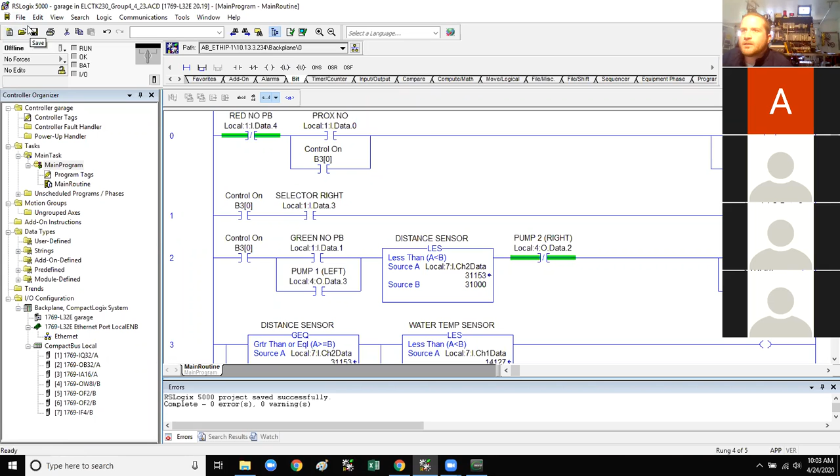First thing we need to do is, we ran into problems last time because we didn't have any inputs to tie into our program. So I'm going to need help with this. If somebody can get all the inputs and outputs pulled up. What we got to do is all the inputs that we're using for our program, we need to parallel a B3 around them so we can pull that bit up in our HMI software.

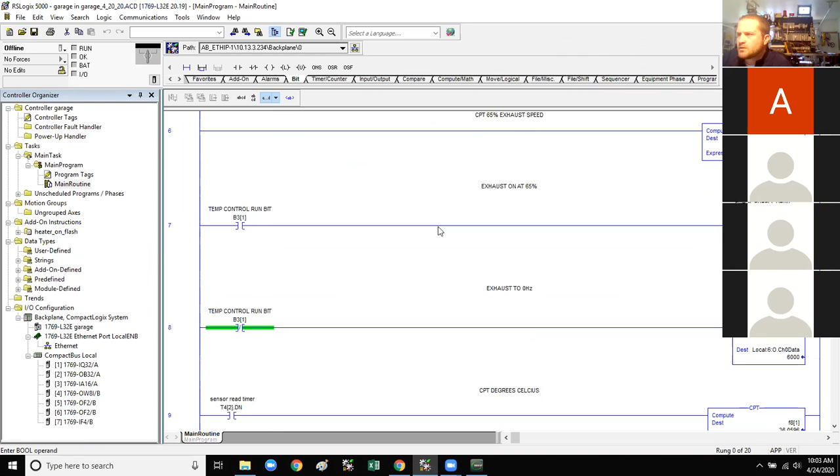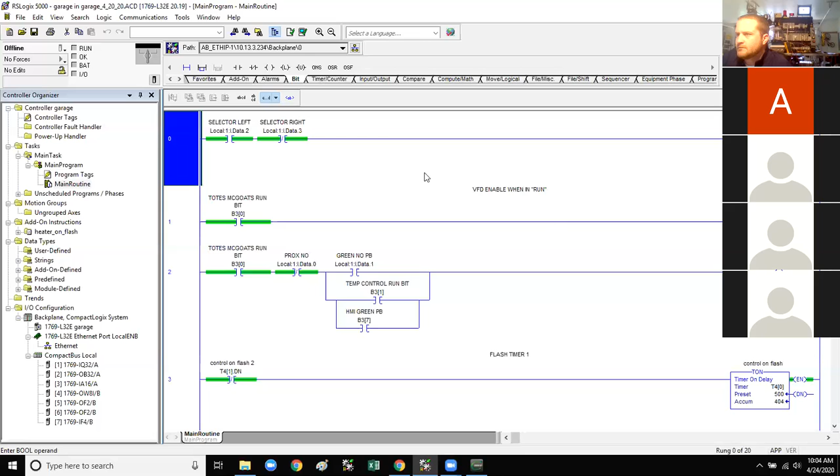Okay. We've got this B3[7] around our temp control run bit. Let's rename that. So selector left, that's our enable, like process enable.

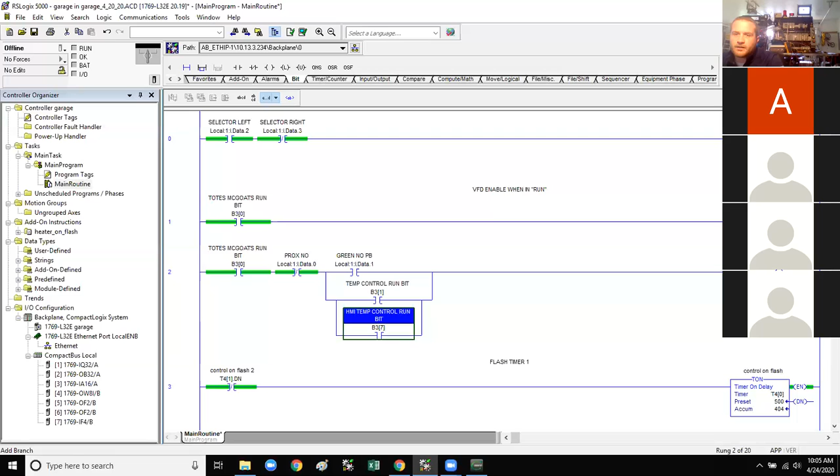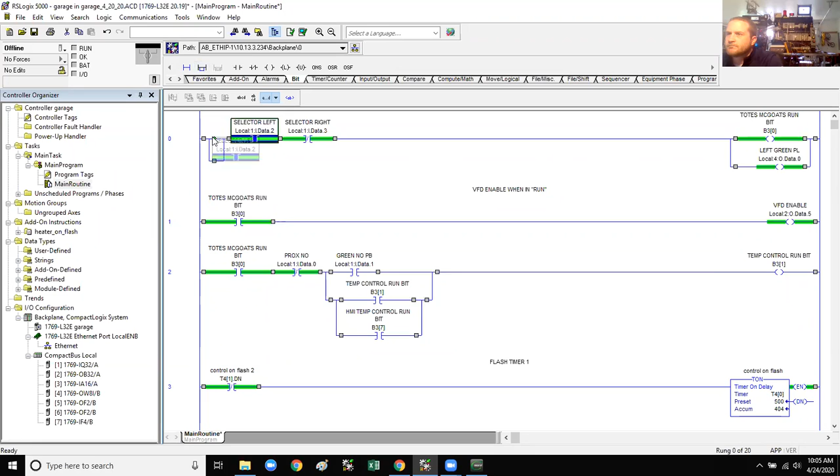Hello? Yeah, you guys got to help me out because I've been working with everybody in all their groups and I have all these different processes in my head. Sorry, go ahead. I don't remember this process. So selector left, that's our process enable. No, I don't believe so. Let me check, I wasn't on that. I was on that. It is? Okay, yeah, it is on there.

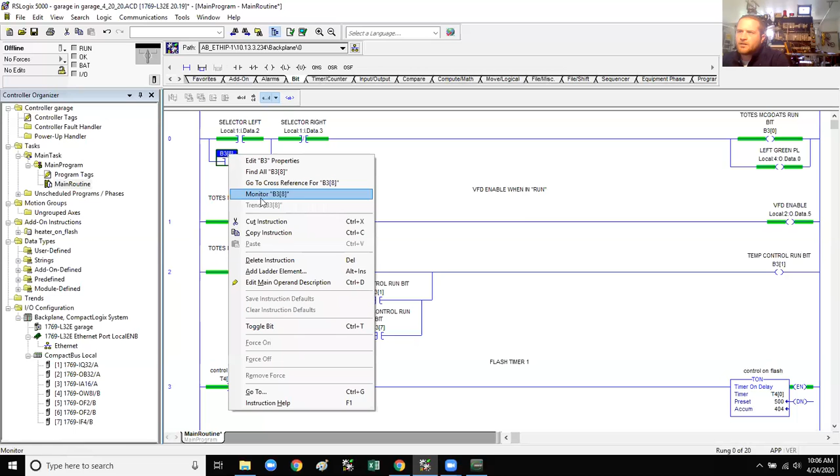All right, so we need to add a B3 for all of these inputs, all the push buttons and selector switches and prox switches. HMI, process enable. Prox switch is our kill switch. Is that right? Yes, yes, so we need to add an HMI kill switch. So this will be HMI e-stop. Make that B3[9].

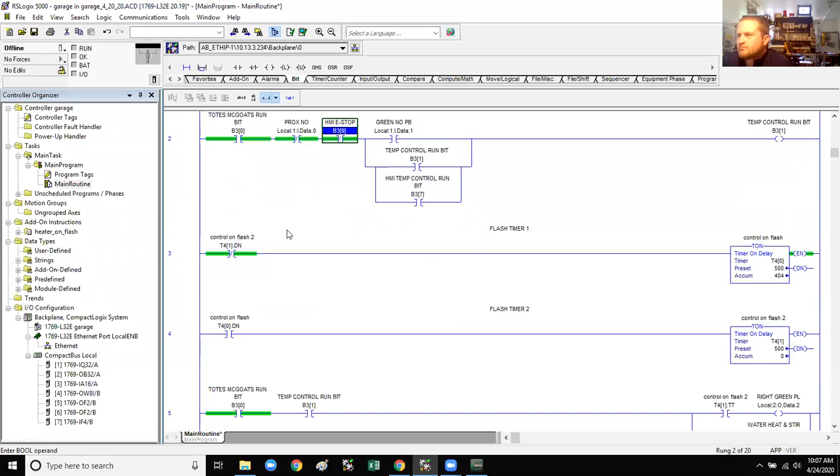I missed it, start from the beginning. Nope. Zach, start over, please, ain't happening. Dude, serious? We're not, all we're doing right now is adding B3s to all our inputs so we can put them into our HMI program. Oh. Are we gonna have to connect the HMI for our final? No. All right, well, then I'll see you guys Monday. See ya, I'm just kidding.

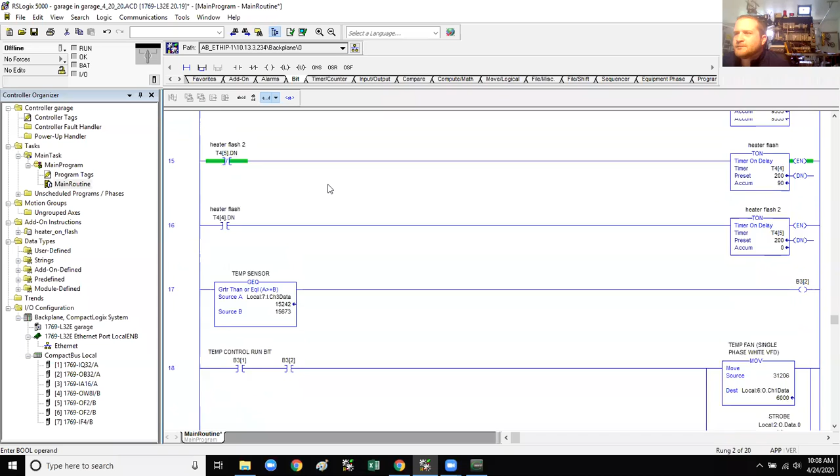It's awesome that you can design like essentially what is like—I forget where I was even going. Yeah, how come we haven't just muted Nathan yet? Okay, that was last week. Oh, poor Nathan, that's every week. Don't worry, that's every week.

All right, is that all we have for inputs? We're not using the yellow button or the red button? I'll go back to the process. Oh, I think I got it pulled up. Yep. Okay, and that's fine. Is it?

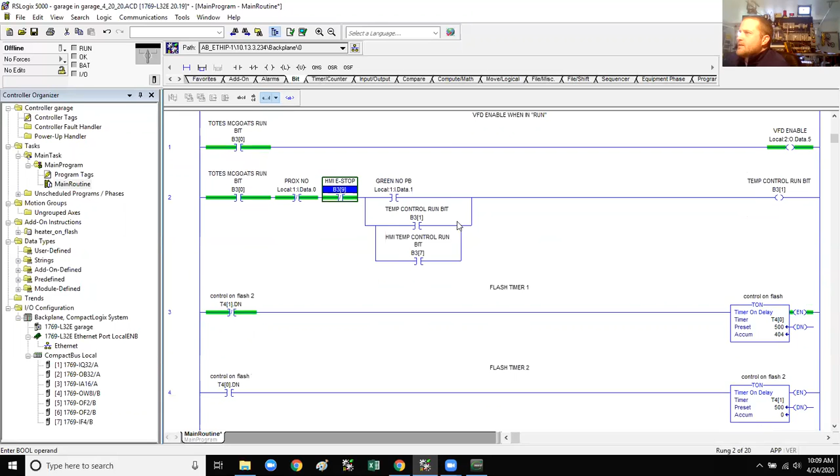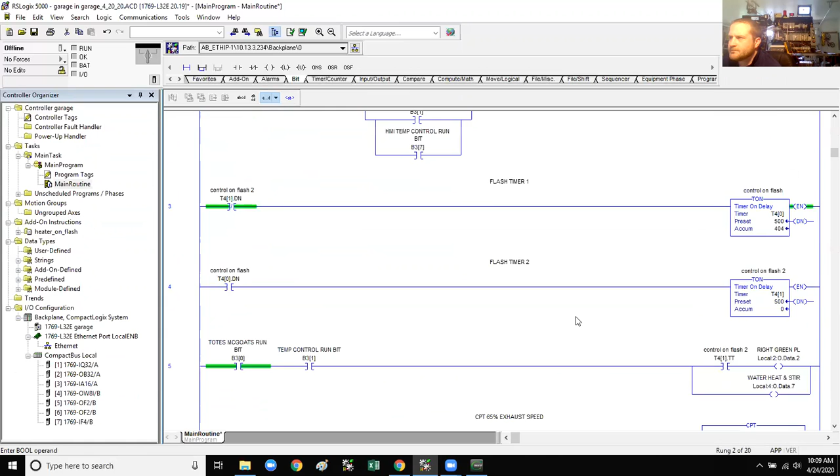The only other thing we need to do is we need to decide, are we going to display temperature in Fahrenheit? Are we going to display temperature in Celsius? If we do, we need to make sure we have an F8 value. The process says it has to display the temperature in Celsius, on the 3-digit display. I'm talking about displaying it on the HMI.

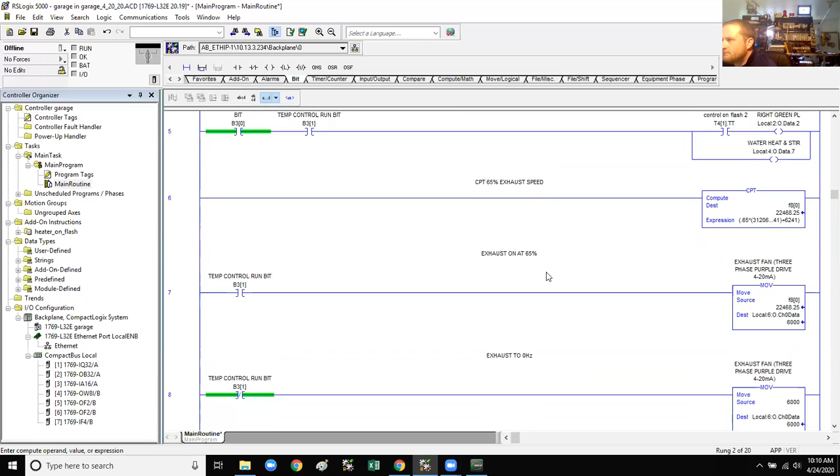So like if we look at all these values that we have, we can use the HMI to display to the user what the fan speed is, what the temperature is in Fahrenheit. So F8[3] is going to be temperature in Fahrenheit. Will we be able to do that? I remember the last time we were trying to do this, we were having some trouble exporting the PLC program to the HMI. Yeah, I got that fixed.

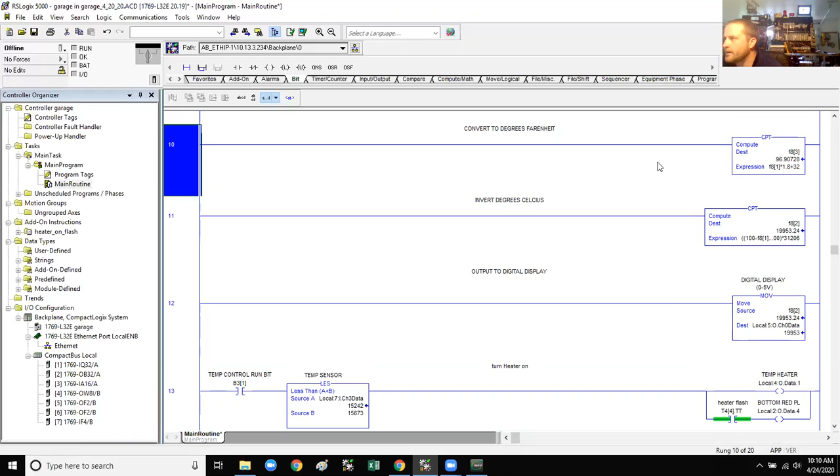I just had to change the IP address settings, and the laptop and the HMI and the PLC all have to jive with their IP settings. So that's all good, we're communicating just fine now. Okay, now we just need to make sure we have in our program what we need. So somebody write down that F8[3] is temperature Fahrenheit. F8[1] is temperature in Celsius. What else do we want to display?

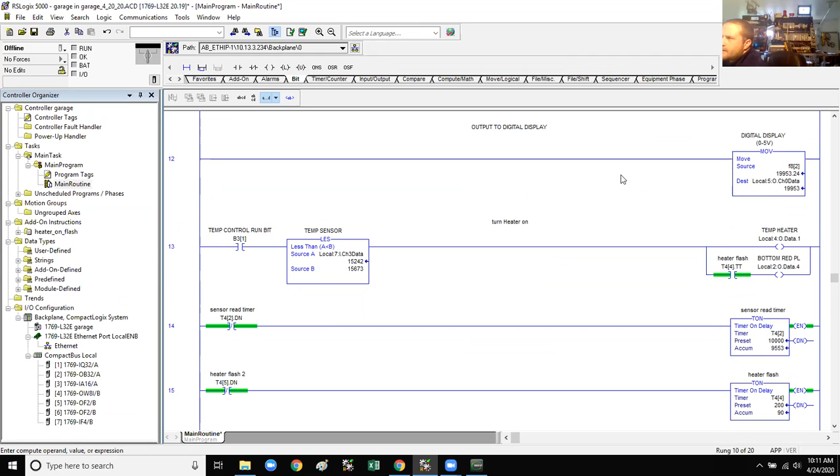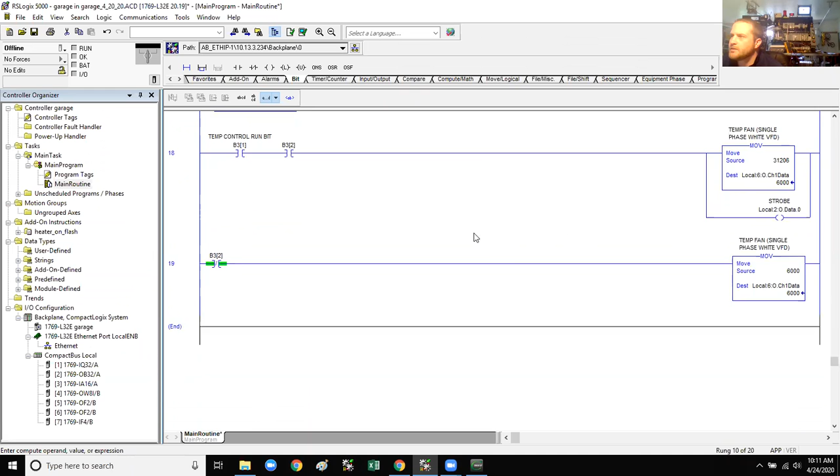We can display all the pilot lights. Those are all ready to go, we don't need to do anything there. We might want to display the speed of each fan in like a percentage. You guys want to do percentage or hertz? Hertz.

What class is this technically? 232? All right, well, no, I was just wondering for the, like, what I'm looking at under Blackboard. We should do temperature in Kelvin. Just kidding, that was a joke.

All right, I'm just going to add a couple rungs here because I don't think we have any F8 values that are fan speed. So I'm going to make, let's see, compute.

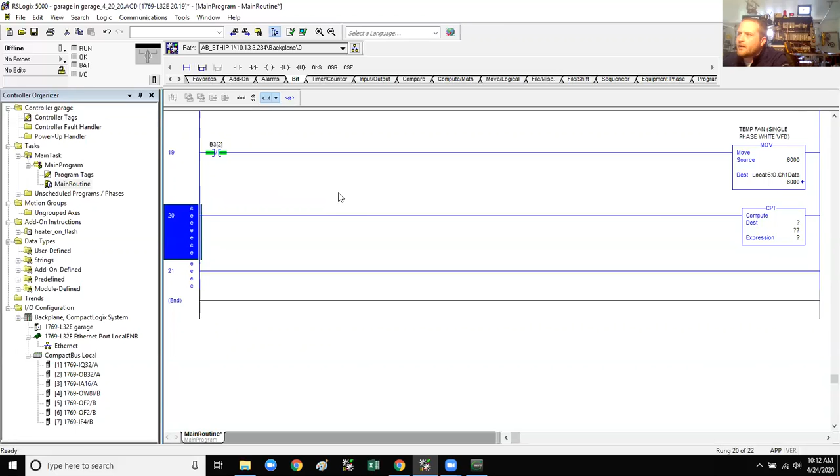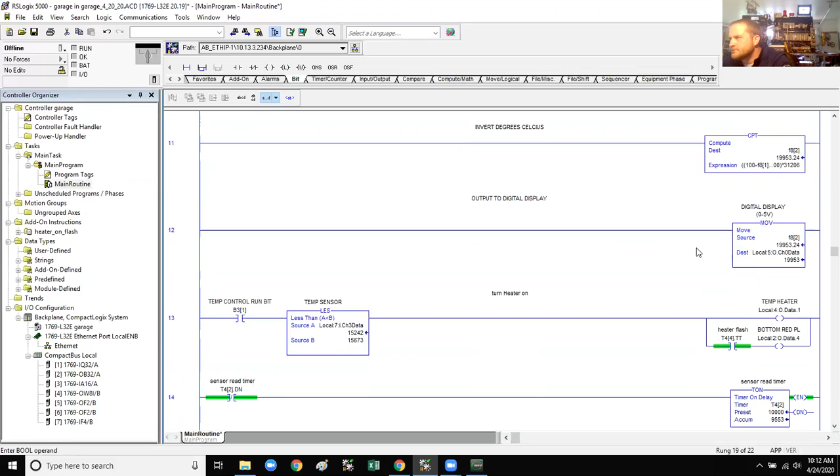What did we decide? What did we just use? 7 and 8? What do we use? F8 what? F8.3 for temperature in Fahrenheit. F8.4 for temperature in Celsius. No, F81 for Celsius. So we're using 1, 2, 3.

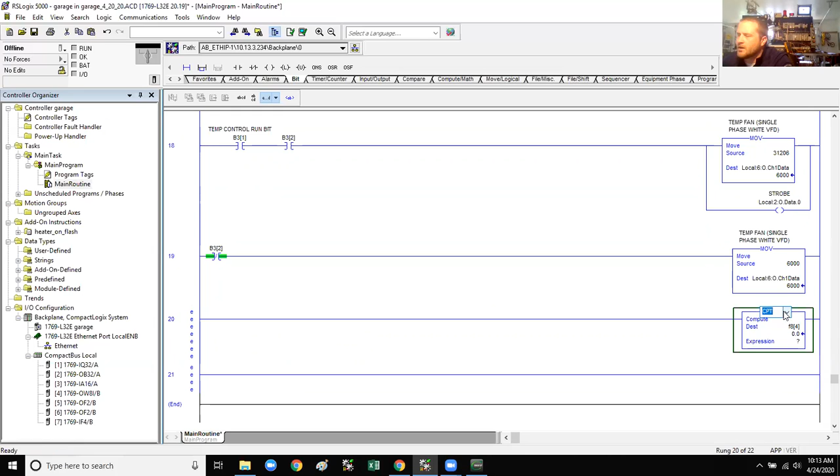So let's call F84—it will be the temperature in, or no, fan speed, exhaust fan speed. That's not what I want.

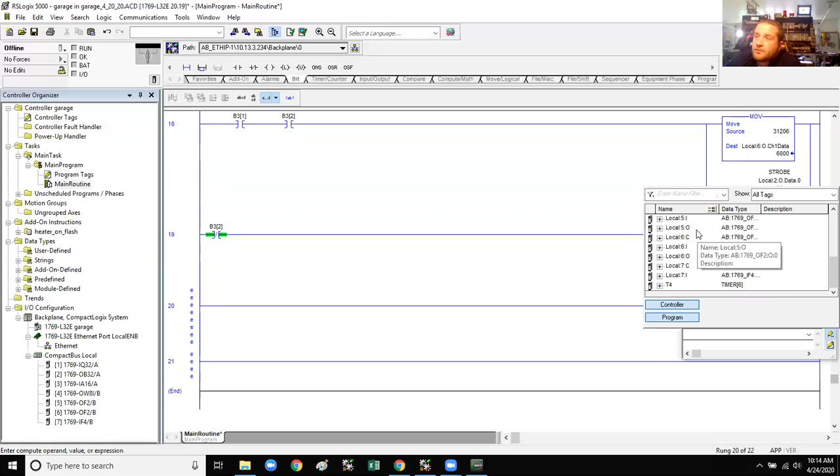So how do we find the exhaust fan speed? Any guesses? Well, don't we have it set to 65%? Yeah, but we want it in real time what the fan speed is, just to show the user. With the VFD? Yeah, so anytime we change the fan speed...

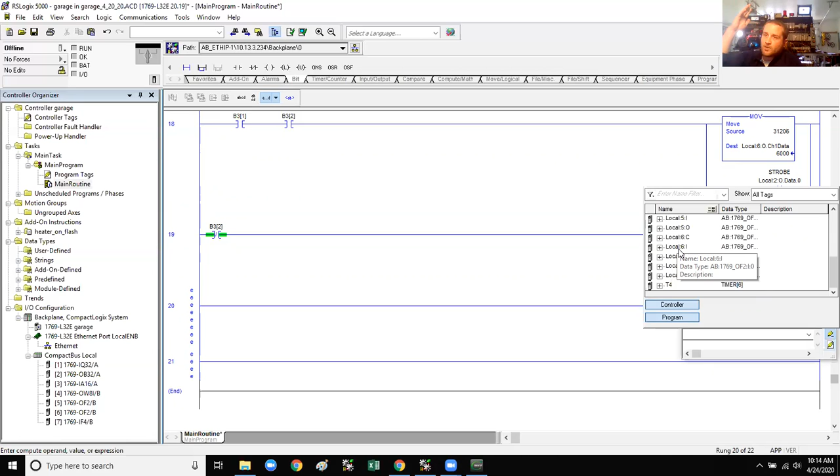It'll show it on the HMI. Does the HMI have a compute function, or could it be connected to a compute function? All it's going to do is take the tags we have in the program in the PLC, and sit there and read the PLC program. The PLC is going to tell you this F8.1 value is 34.9569, and it will take that information and do whatever you want with it.

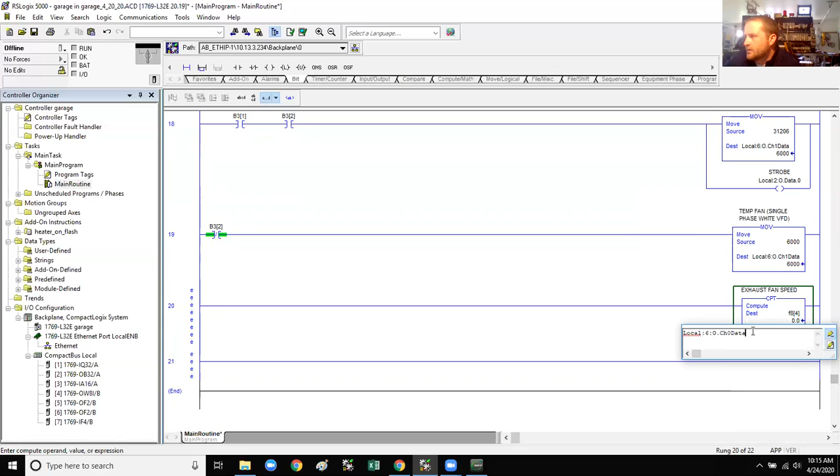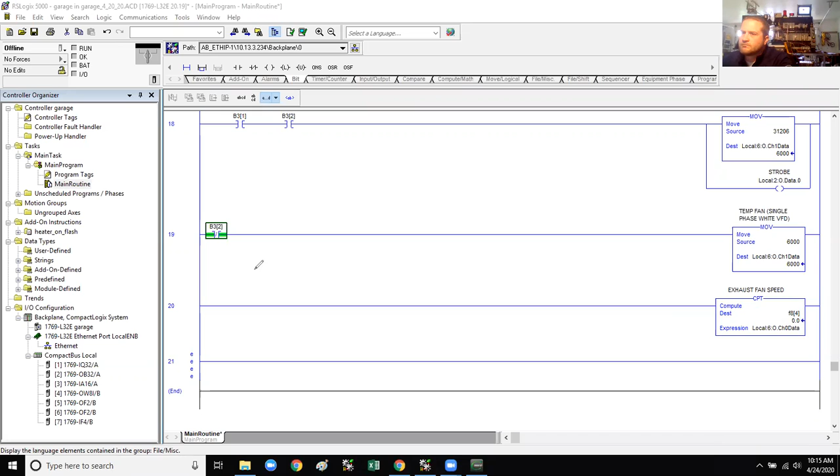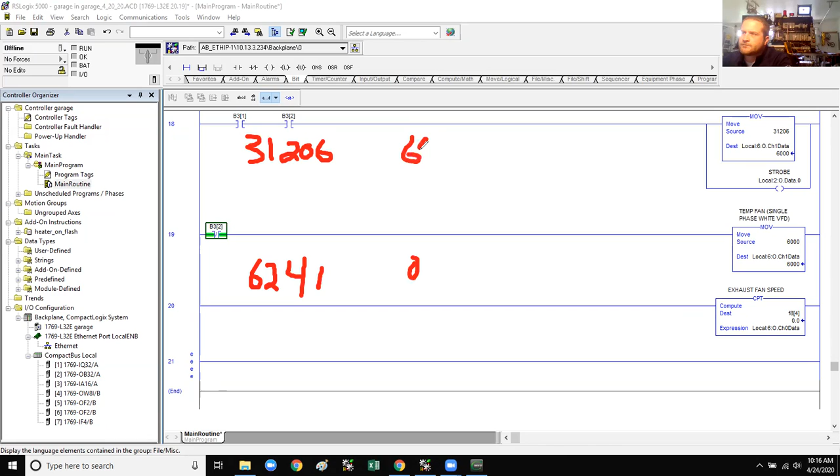Okay, so how do we interpolate those numbers, 6241 to 31206? And this will be the same calculation as the temperature fan, 6241, 0 to 60, 31206. So F8.4 is going to be somewhere in here.

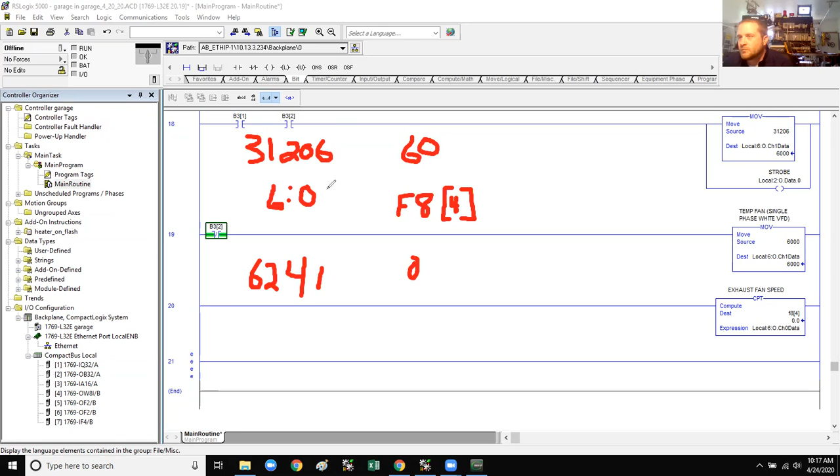So we want to take this value, which is local 6 output channel 0 data, I'll just say 6 out. Whatever that happens to be at the time of the program, we want it to spit out a 0 to 60 number. So how do we do that? With a compute. If 6 out happens to be 20,000, we would take that number and do what? We'd find a percentage of this range, right? Yeah.

So we're going to take 6 out, and that's our output number, minus 6241. We're going to take that divided by the whole range. Following me? And what does this value give us when we calculate that? It'd give us the percentage of this range, right? Yeah. Very good. And we're going to take that percentage and apply it to this range. So this whole formula times the range of 0 to 60 is just what? 60. Yeah.

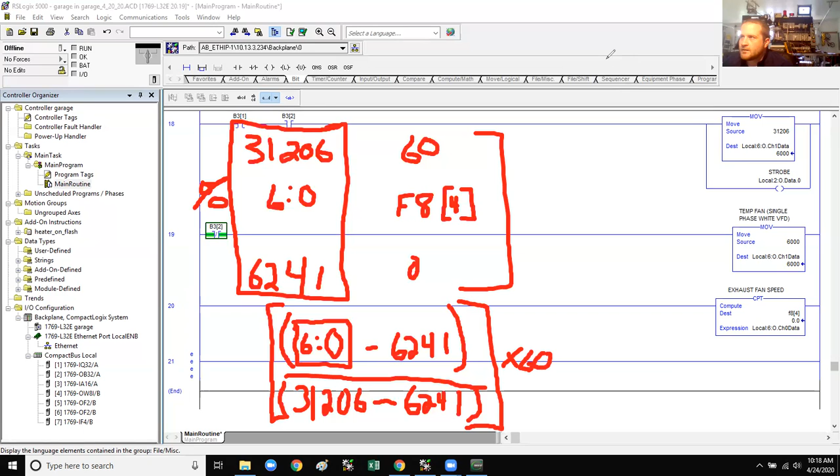So our expression would be local 6, whatever, minus 6241, divided by 31,206 minus 6241, that whole thing times 60. This one we're going to call F85, and that's going to be temp fan speed.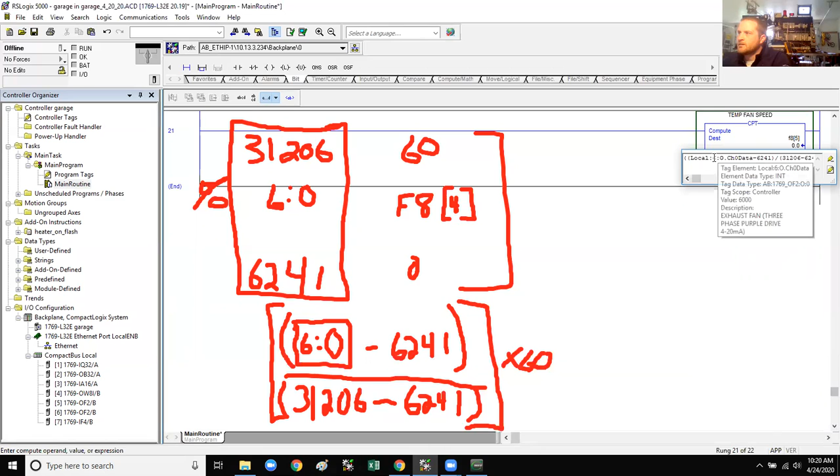The only difference is this. I think it's going to be channel 1 data, right? But we can just use the tags. So it'd be 6 out, channel 1 data. Cool? Yep.

We're doing that because we want to control the temperature cooling fan. We're not using these rungs to control anything, we're just assigning compute the Hertz value to an F8 number. Then when we open up our C-more HMI software, we can use these numbers on a display screen that shows you the exhaust fan right now is at X amount of Hertz, right? Yeah. Cool.

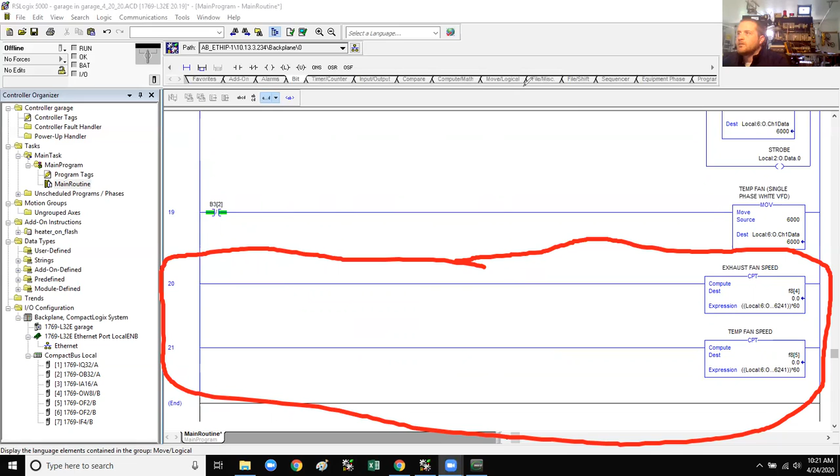All right, and then I'm going to save the XML file. I'll save that as 4 24.

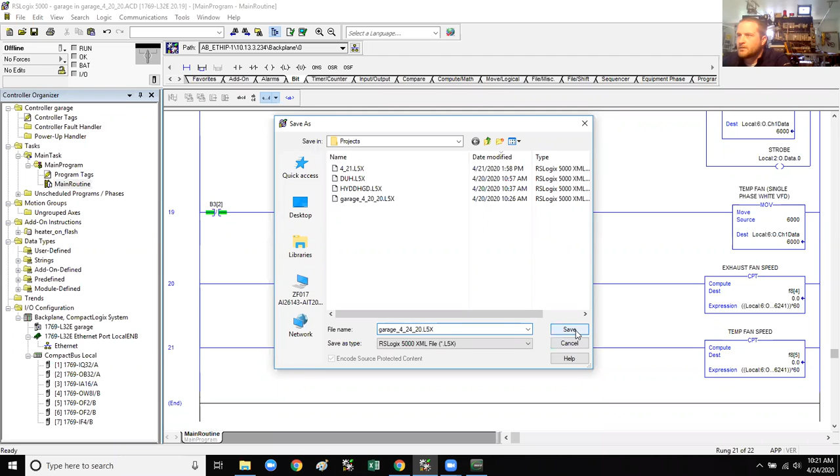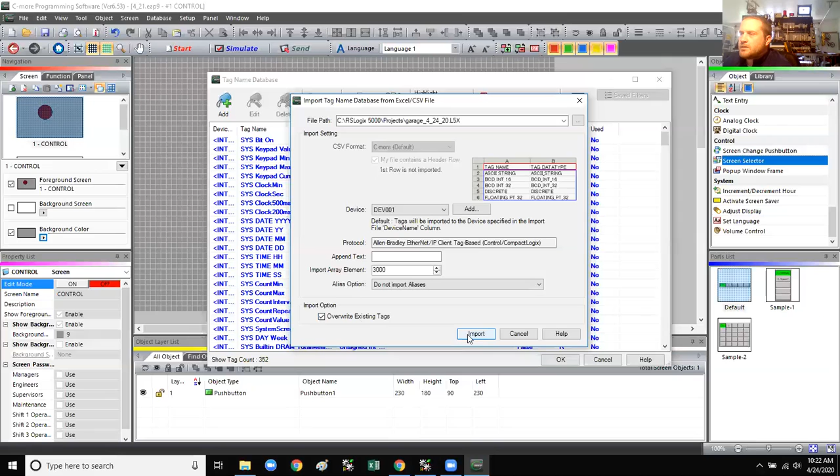I'm going to go into C-more. Database, tag name database, import 424. This device, overwrite existing tags, import, filter. There's all of our tags that we just imported. We should have an F8 whatever.

Yeah, but the description, I wish it would bring the descriptions over too. Now, is that because it's older software, or does it just not bring the descriptions over at all? I don't know if there's a way to do it or not. I guess when you save it to that L5X type file, it doesn't save the descriptions. I think if you had your own tag names, like if we went through each of our tags that we were going to use and made our own tags, it'd be easier to figure out what we were using. But that's just not how I personally write the software or write the logic.

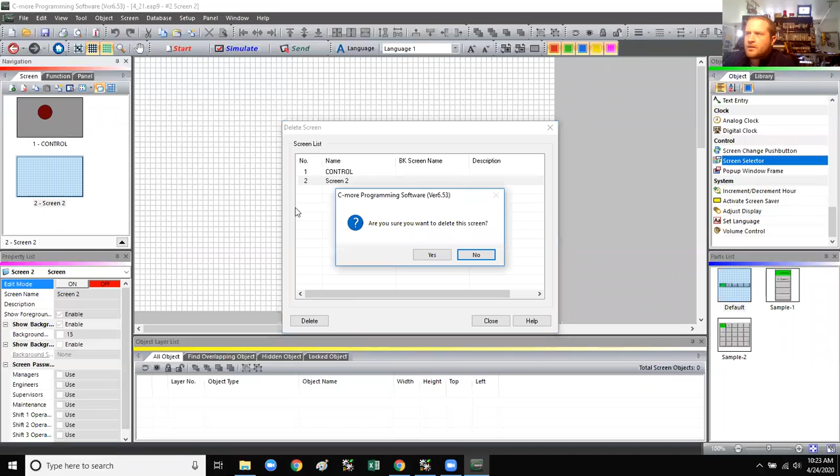So, but it's okay, we've got a list in front. Somebody's got a list in front of them, right, of what we just talked about. Sure. Good. Okay, I'm gonna start over with this screen. So here's all of our screens. I'm just gonna delete this one for now. I'm making screen 1. You got a stop button. We do.

Screen 1, what are our inputs? We've got e-stop, the 3 B3s that we put in there. We've got e-stop, we've got control on, control on, and temperature control start.

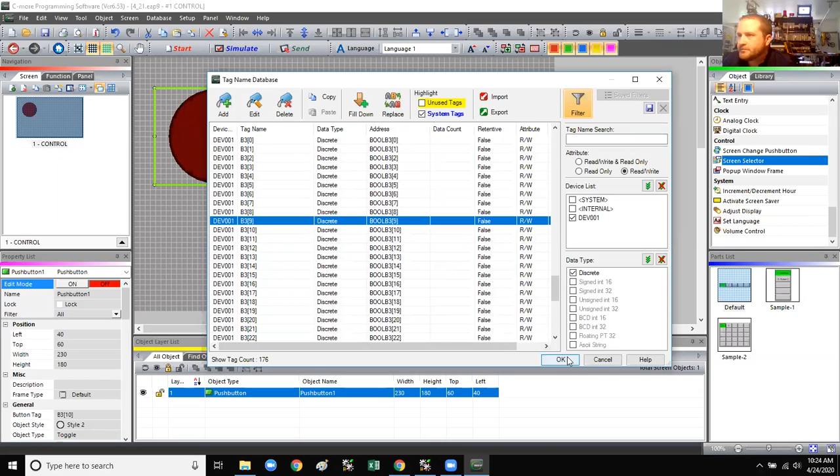Right, okay, so let's edit this one. Name, e-stop. I don't care about all this stuff. Tag, we're gonna make that B. Is it B? What is the e-stop? B3 what? 9. Thank you, somebody. Brayton. B3.9.

So we can have the object type be toggle. That's a normally open push button, right? And in our logic, all we need to do is momentarily energize it. So we're going to change it to momentary on, which will make the bit true, and so on and so forth.

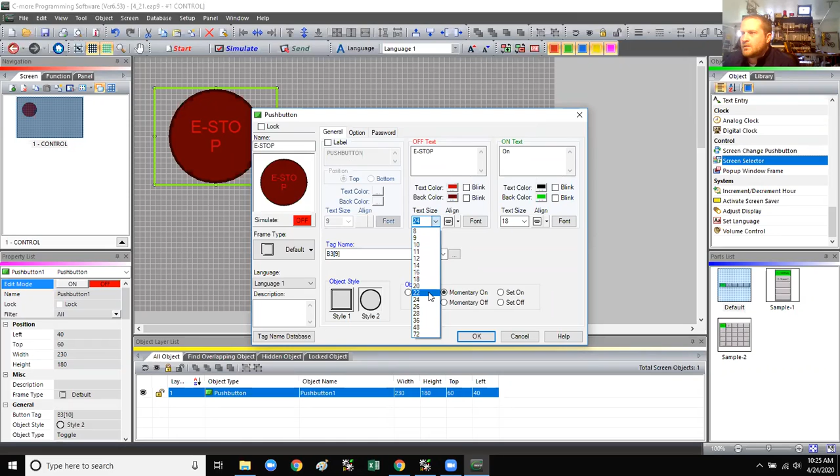B39, text size. So we'll make it, we want it to be dark red. We want to say e-stop. Bigger. And when it's energized, just when I depress that button, we'll make it say stop, and we'll have it like a bright red.

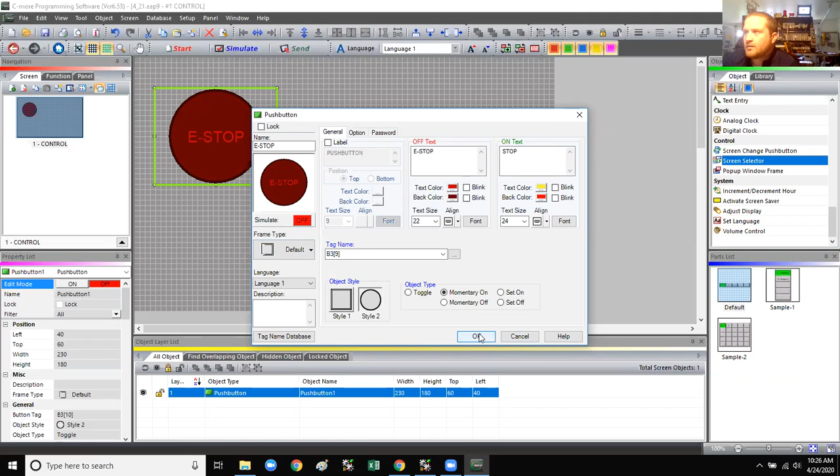Then if you want to simulate it over here, so right now it would be in the off or de-energized state. And then when the HMI is loaded, I press that on the HMI and it will momentarily turn to that, and then I let go and it'll turn to that. But it should stop the software. That's cool. Well, hopefully we're doing it right. That's the only thing.

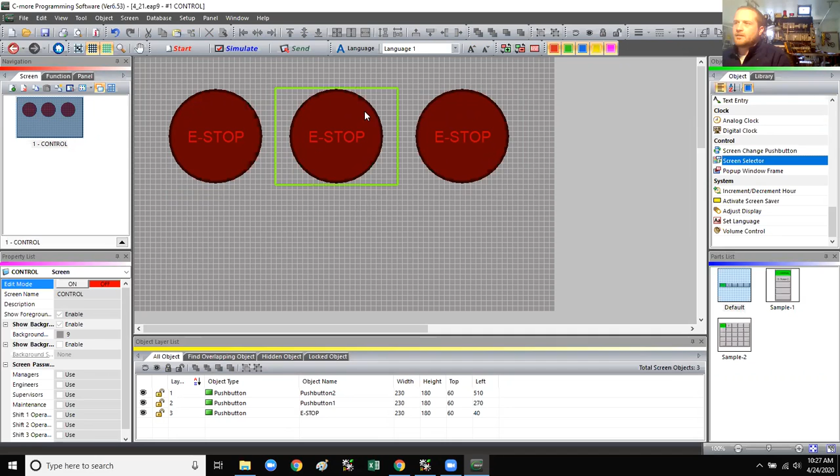We could put different types of buttons in here, maybe we will. But all I did just there, this stuff is really easy to manipulate. All I did was Control C and Control V, just copy and paste. And then now I can just change this one, this will be our control on.

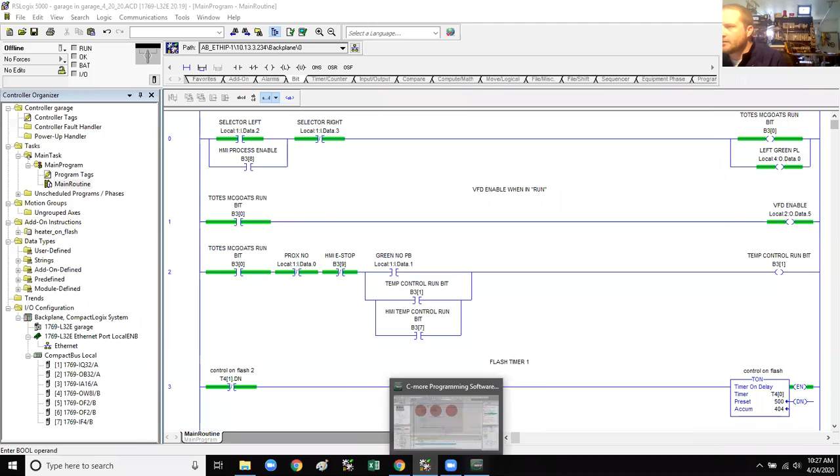What was our B3 whatever? Process enable is B3.8. We want that to be like a green, right? And then when you depress it, it'll be something like that.

Process enable, and make the text size say enable. Okay, so that's what will happen when we do that. That's going to be a momentary on. And then...

Temp control start will be the next one. Was B39 the right one? What did we say it was? I don't remember. 3.9 was the stop. B3.8 was the process enable. Thank you.

Okay, and then this one will be temp control. What do you want to do with this one? Make it like pink. Yellow. Pink.

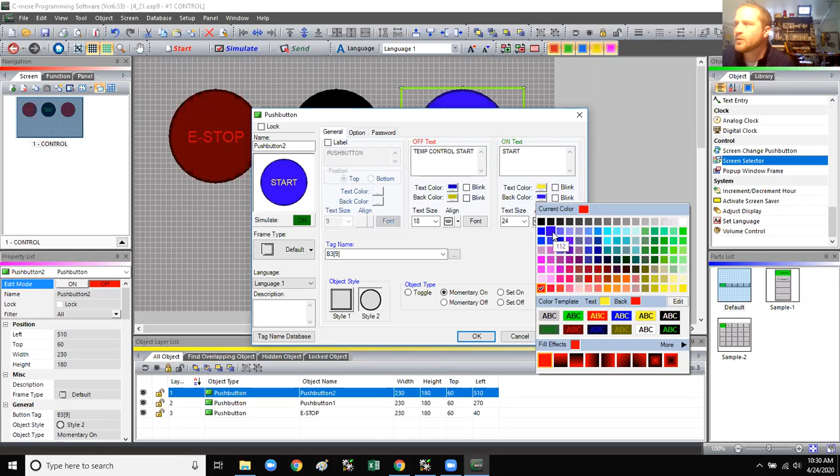So we're kicking John out today, or, wait, speaking of destroying things, did you ever change that fuse out? Or was it, no, it's still. I do have some more fuses, but that's a great question. I think he's got a bolt in there instead, that's cool. Look at these things, look at this, look at these little shaded doodads. A red start button. Oh my gosh, that's deadly, okay, those are cool.

Fill effects, this is cool, let's do something fancy. So I know you said it wasn't required for the final, but can we do that on the final? If you have extra time, heck yeah. So, I will not have extra time. You're already planning out that you don't have extra time.

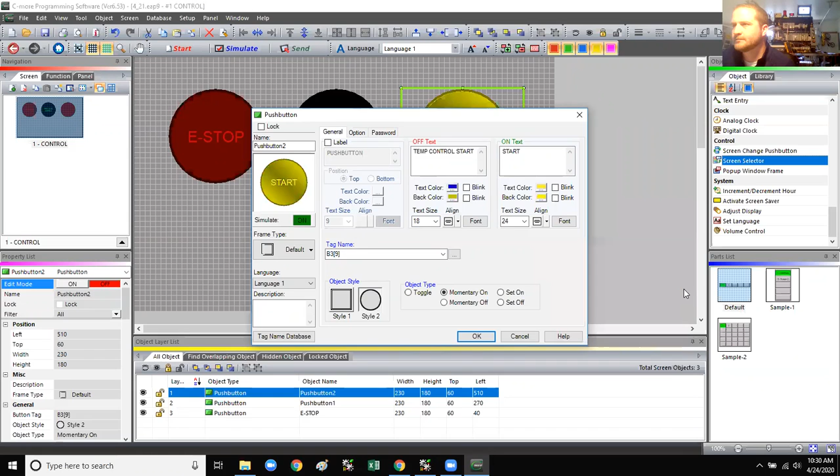So simulate it. Yeah, I don't know what this is. I'm getting out of here.

All right, right now our background is just a gray screen, but we can do some fancy stuff there. So this is just going to be screen number one, it's going to be the control screen, and eventually we'll have other screens that will display other things we want them to do. But right now, this is a good place to start. So, background, we're just going to put a picture in there.

Whoa. User graphics, that's cool. I just downloaded something. I guess it's not going to work because it's not a bitmap.

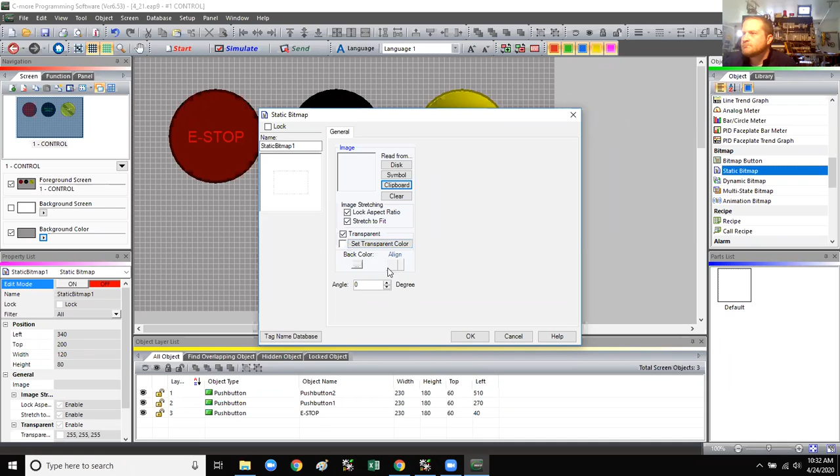Oh, boy. Landscapers. I guess we can't put that picture in there right now. Whoa.

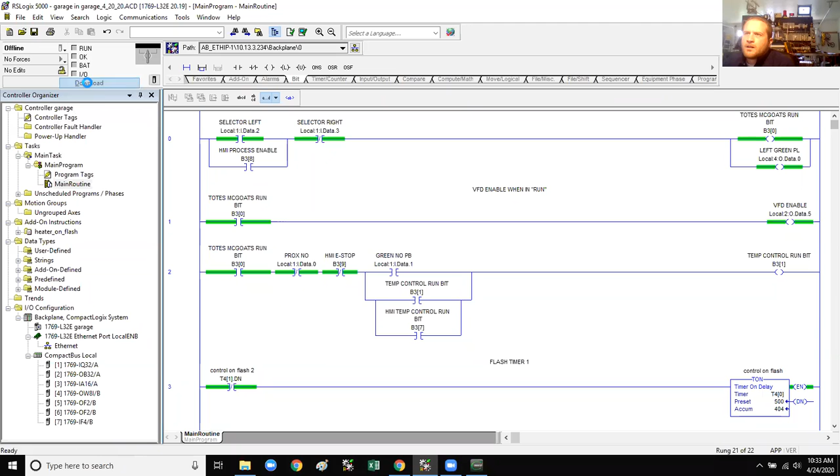All right, so I'm going to save this and send it. Could you add pictures, like say a certain meme about the L drive? Oh, I could, but actually I downloaded this ICC logo and was going to put it as a background, but it's saying you need it as a different type of file instead of a JPEG.

I don't know how to do the convert. Do I look like I know what a JPEG is? It's just a file type. She knows what a JPEG is. I just want a picture of a goddamn hot dog. There's some converters online, but...

Wait, where's Luke? I don't know, I texted him. I was gonna say, because him and I had to do those conversions a lot for our project class. Project management.

We're partners in project management, ma'am. All right, I know we were partners. That was quick. But I also - let's see if that worked.

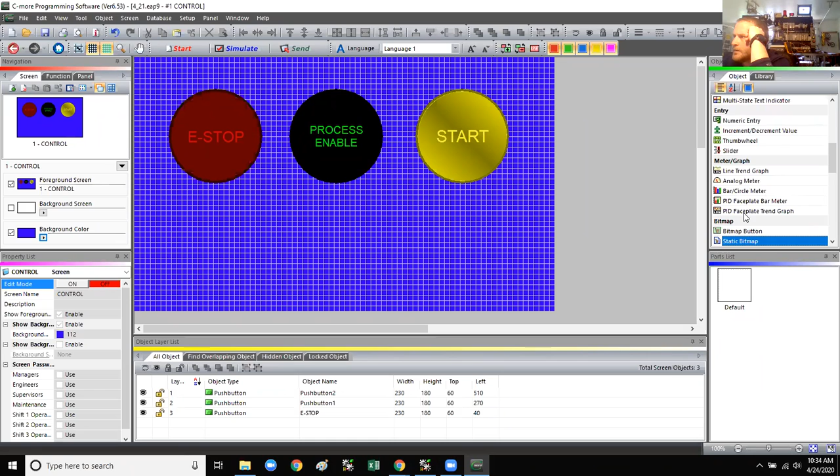Where to go, static bitmap. Boom, yes.

How do you send it to the back layer? Oh, it's at the bottom. Are you able to drag that layer down so it's layer 4 instead of 1? Yeah, you can do it that way, or you can just say send to back.

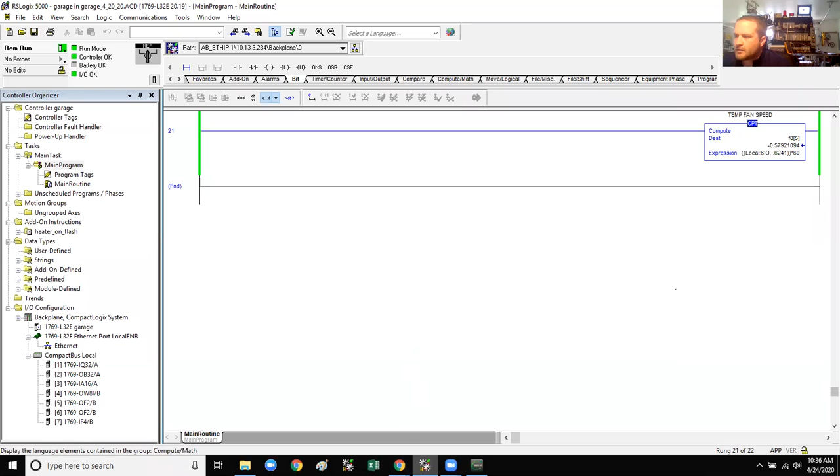Are you leaving us for another Zoom meeting? No, I'm trying to figure out where my meeting control is. There we are. Are you finally gonna kick Nathan? Dude, no, what the heck, he's been very respectful today. I don't know that I would agree with that statement.

Control Alt Shift H. Good grief. Oh, here we go, send.

Can you guys pin my video so you can see what's going on, or do I need to stop the share? We can pin your video. All right, well let me know if you can see it very well, and I'll change it. So I'm going to hit transfer. Well, I can't see it very well because it's very bright in there.

Yeah, I know, I was trying to mess with the screen and everything. There was like a red circle on it, then it disappeared. Right there, oh it goes. There it is, the red circle - now if I hit it, was it his previous program?

So I don't remember how our process even runs, but if I hit that - that's the e-stop, process enable. Oops.

The latch no longer works. Yeah, so we need to look at - is that because we have it set to momentary or whatever? I don't know, I have to look at the logic.

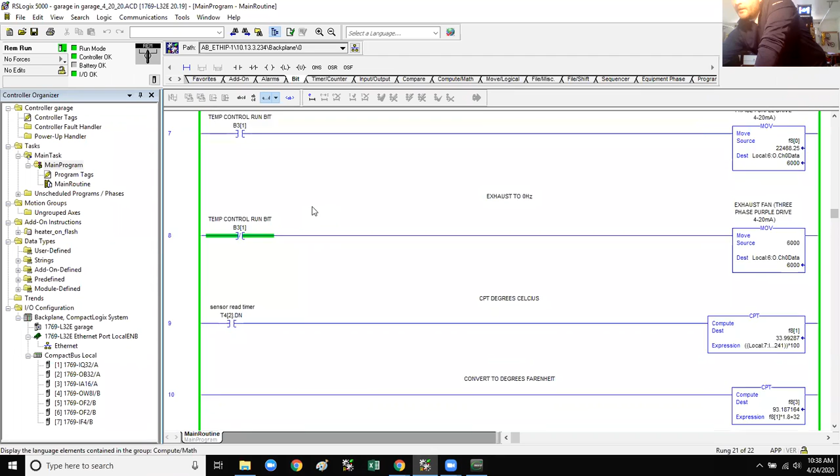So here's our - delete - oh yeah, that's right, because the selector switch is not momentary. Okay, so we'll have to just change that. So here, you want to watch in the logic what's happening?

So here's where I hit that button. See how it becomes true? Yeah, right. Latch, because before we were depending on the selector switch.

So all we got to do is go in here and say we want this as a toggle. How do you have to send that again? Yes, or okay.

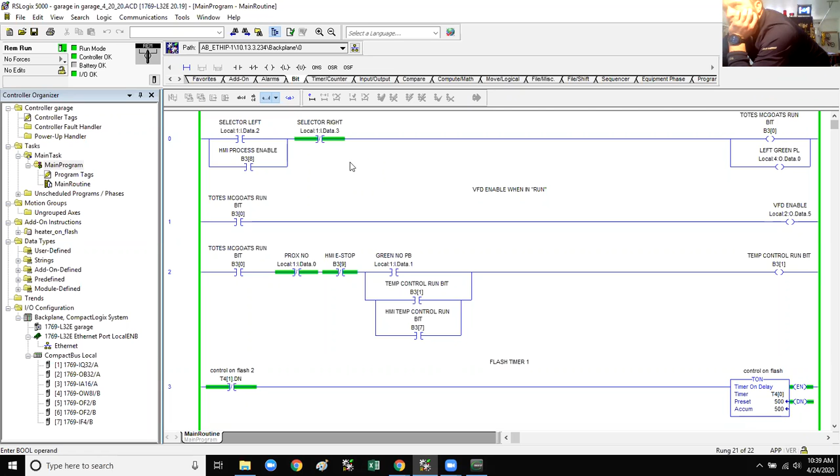Okay. All right, so I'm going to send that. Transfer. Oh, I remember what I was going to do.

There, maybe that'll be a little better. I have extreme doubts, can you see it a little better? Oh yeah, kind of. Yeah, a little bit. All right, here we go. Process control. Cool.

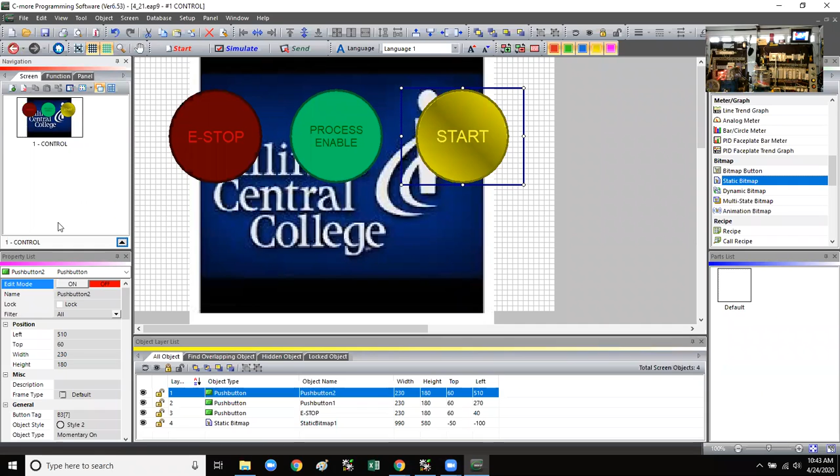So I'm making a list of all the people I need to kick out. I think we got Brady, McKenzie, John, and Nathan so far. Nathan's like my favorite today. Yeah, but he should be kicked on proxy. I'm gone, Brad's gone. All right, back to this here deal. Zach, you're doing a great job. Thanks, Nathan. You're welcome. Stop kissing his ass, bro. Yeah, I was gonna ask you if it stinks in there, brown noser. Yeah, since they got a little brown on your nose, Nate.

Let's go screen 2, and we'll call it - what all are we monitoring? Let's say temperature. Hey Kenzie, while he's setting this up, you want to hear a really funny joke? Sure. Women's rights. Nate has been added to the list.

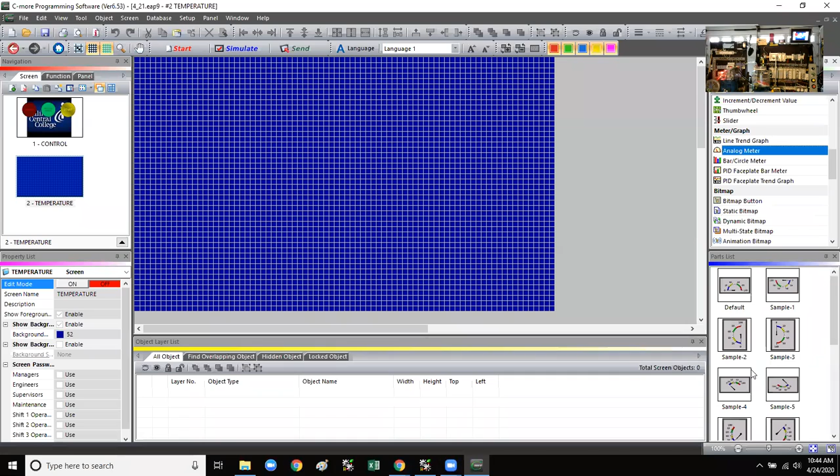All right, I'm not really sure what to say now. We can have, what can we have? We can have an analog meter. Let's do that. And we can have one look like this. And we'll call this Fahrenheit.

Right now it's 0, 20, 40, 60, 80. Tag name, what is our tag? F8 for Fahrenheit. For F8.3 Fahrenheit, it was Fahrenheit. F8.3, that's 3. Yep. Number of major divisions. Display range 0 to 100. Meter movement, clockwise. Needle.

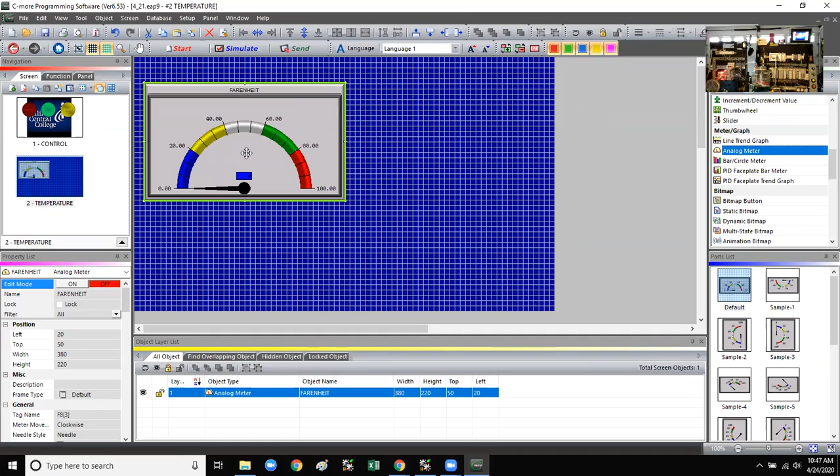And then this, so this is what the graph will look like, and this should show temperature in Fahrenheit. And I don't think we're going to go 0 to 100 there, are we? We should go to like 50 to 150, because we're staying between 80 and 120 degrees Fahrenheit, right? Yeah, so will it automatically jump? No, it'll show you what that range is. 0 on that meter are low range, so like our 80 - no, it's going to show you whatever the F8 value is. Okay, so we'd have to change the values.

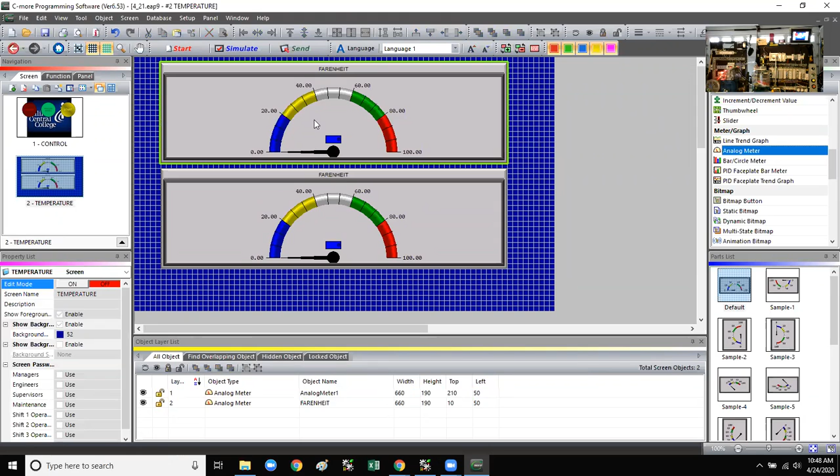Before we do that, I'm going to move this guy. Let's see. So this will be Fahrenheit. There's a reason I'm leaving room down at the bottom. But if this is Fahrenheit, we want that to be like, well, I don't know, 50 to 150. And basically, because we want it to stay around 100 degrees, we're going to want that needle to stay right in this little silver part, right? Anyway, yeah.

Show digital display. Okay, so this little box in here will show us what the temperature is in that F8 value. All right, now let's do our Celsius one. So this is going to be 0 to 100. Everything's going to be the same except - F8, what is our Celsius value? F8.1. All right, so this is Celsius, this is Fahrenheit.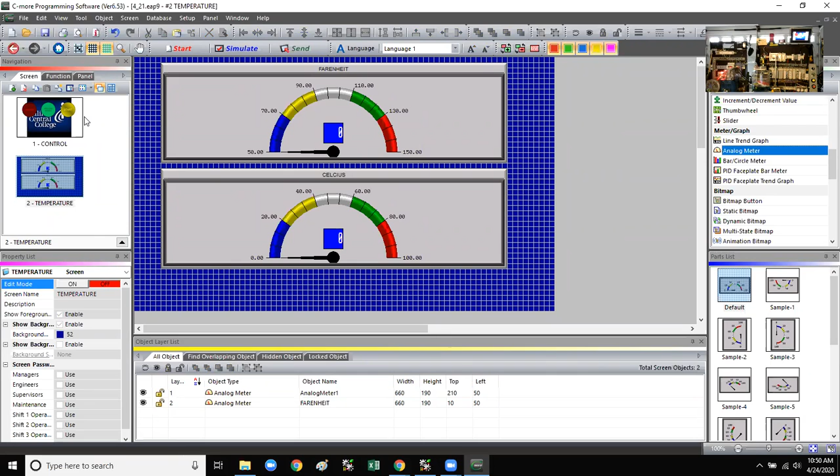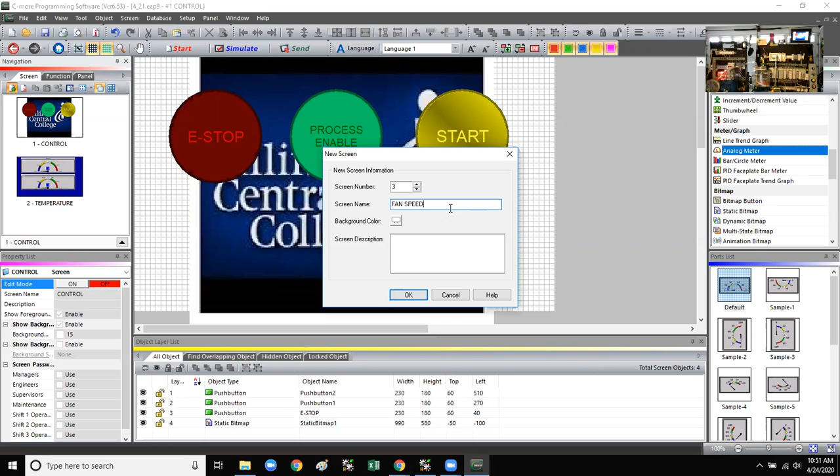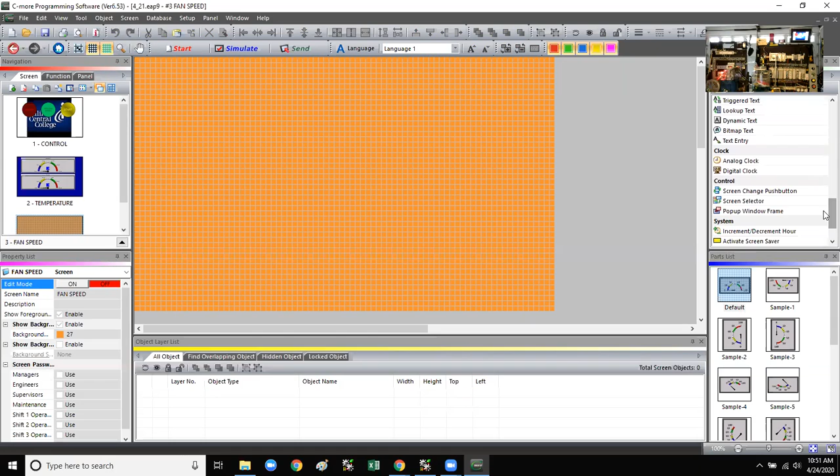Now we need a way to navigate from screen to screen, right? Right, so let's add some more screens that will just be blank for now, but we'll have one for temperature. We can have one for fan speed, is that right? Right, that's a good analog one. Any other values that we want? I think that's a good one, the fan speed. And then we need a way to go from screen to screen. That's going to be under our tools, screen selector. Three columns, one row, screen, all of them.

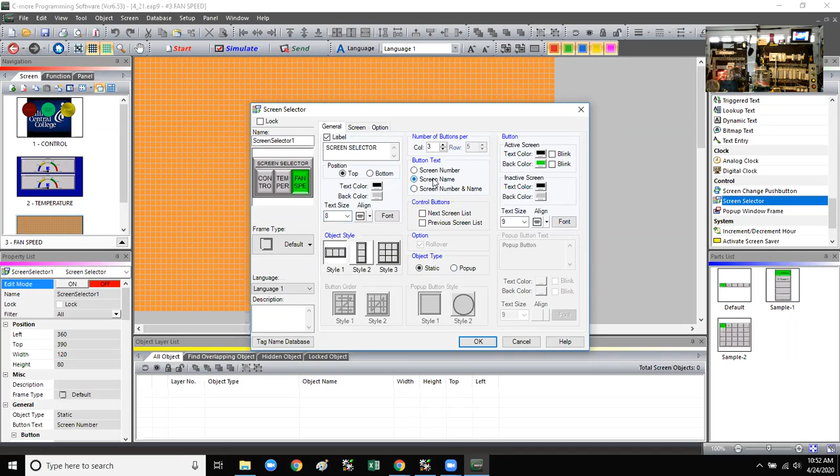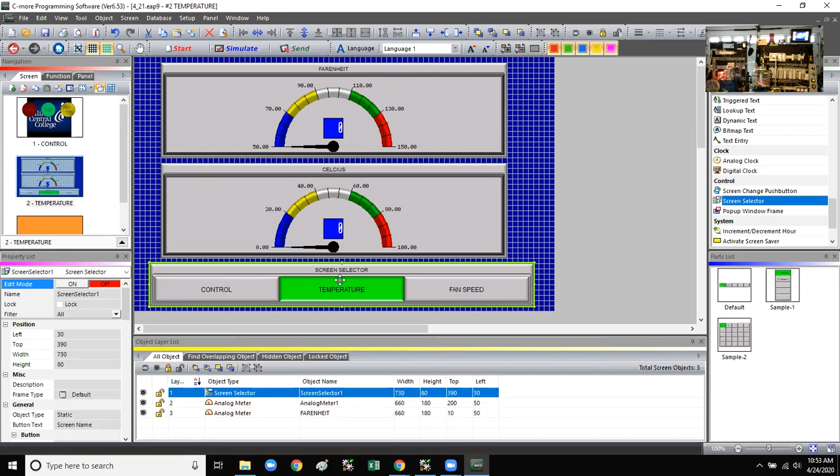I won't get too fancy with this. And I'm going to copy this and put it on all three screens. Cool.

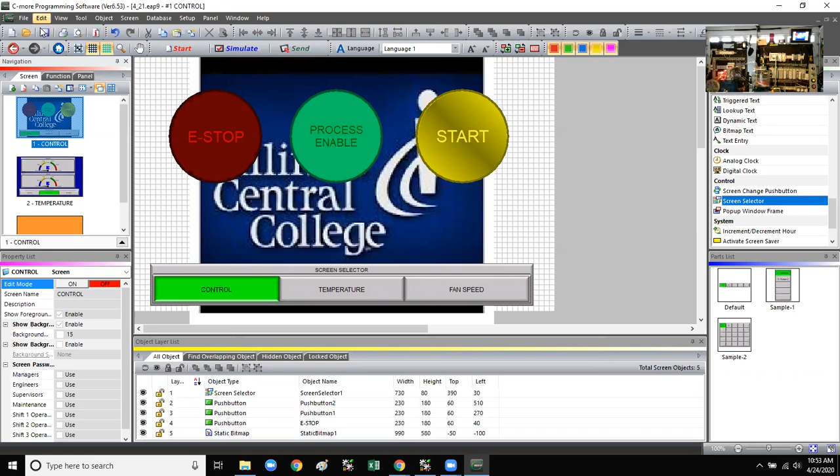You try it out. Sure. Yeah, sorry, I didn't know I was muted. Transfer. Ooh. All right, so now we've got control screen, same thing. I'm going to enable the process. I'm going to do touch control start. If I go over to the temperature screen, it's 67 degrees Fahrenheit or 20 degrees Celsius in here. Wow, kind of cool, huh? That's really cool. But you guys can't see that very well, can you? No, I can't see, it's just a white screen. No, yeah, it's just a white screen for us.

When you had your hand over the camera, it dimmed it, so I was able to see it better. I can only barely see it when you put your hand over the camera for some reason.

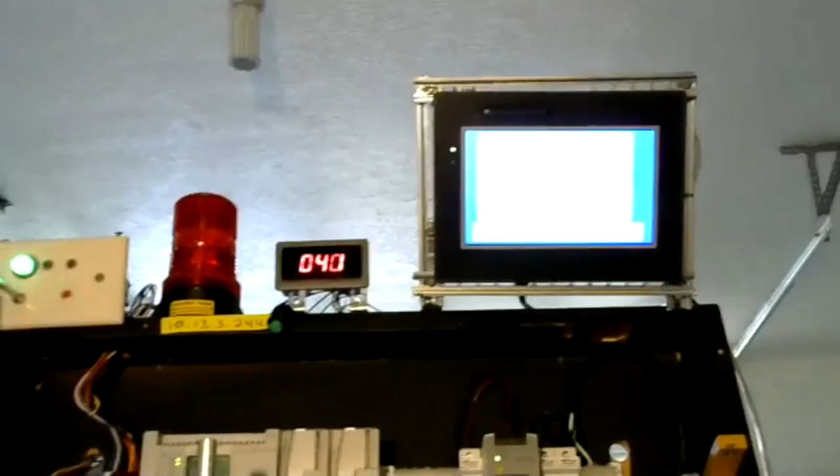I think the background's too bright. Yeah, the background's too bright. What'd you do before? You did something and it made it easier to see. I don't know, I should probably just unbolt it from the trainer. I wanted it up there so you could see the outputs at the same time. I think the first screen was easier to see because we had that ICC logo in the background, a dark blue background, and it made it easier to see the buttons. But this screen doesn't have it.

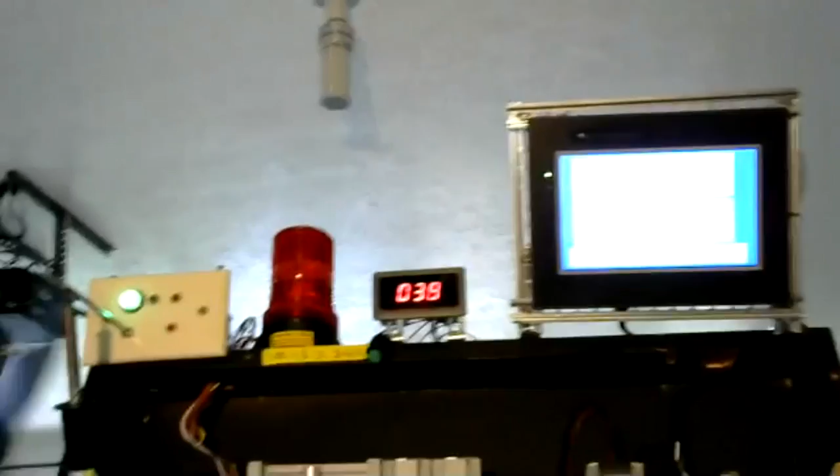Do we need a darker background? Maybe, try a darker background, black or a dark blue background or something. Yeah, agreed.

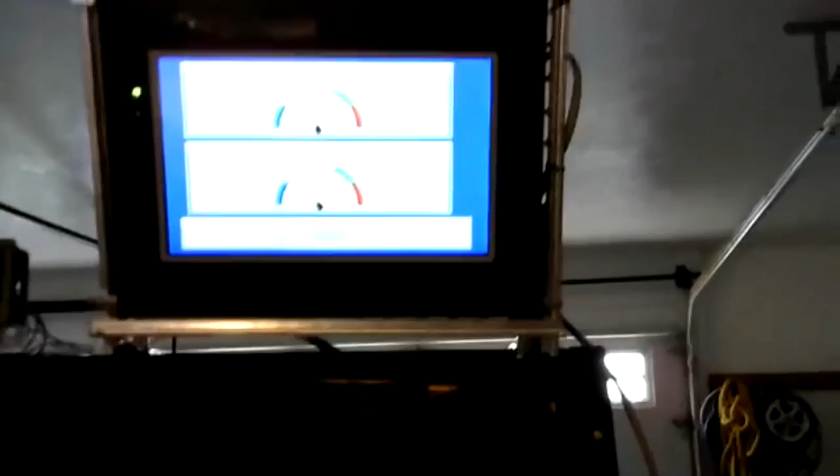There, I can see it a little bit better. I can't see the numbers or the buttons, but I can see the blue and the red. Well, at least you can see the bar graphs, right? Yeah, a little bit. Right there you can clearly.

And what we'll do for the fan speed is make it a digital display instead of a meter, and then you'll really be able to see it a lot better. Okay.

Okay. You guys want to stop or keep going? Doesn't matter to me, I have to get back to work. Yeah, I got plans, I gotta drive out of state.

All right, well, we'll say Monday we'll do the fan speed, and I'm going to go over with you what the final is going to look like. Okay.

Because I have a process with this trainer sort of written up. Does everybody understand what we're doing with that as far as the labs go and your overall grade? Yeah, yep, I have a pretty good idea. Anybody having any trouble with anything else?

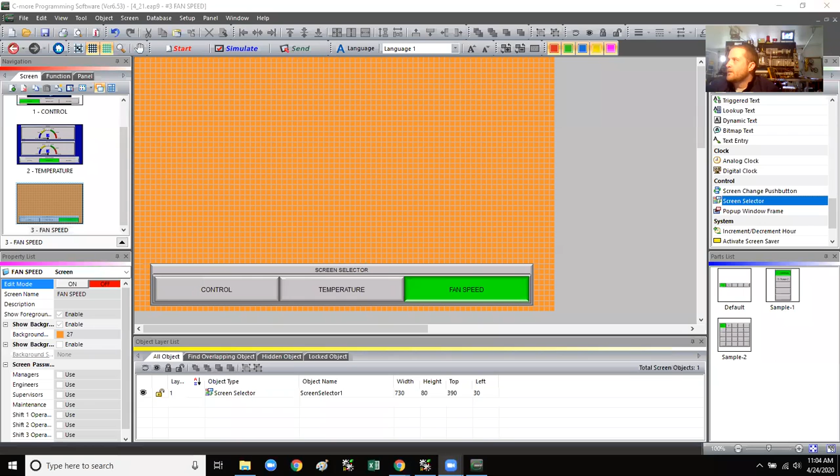But I would just draw a black and a white, or gray, or however you want to do it, coming off of the strobe light and show where it goes. You can draw a power supply, you could have a terminal strip in the middle labeled like these 9 screws are 120 volt plus, these 9 are neutral, these 9 are plus 24, minus 24 — however you want to do it. I drew this up to hopefully make it easier for you.

All the PLC outputs and inputs are on here, and it shows you which components you have on the trainer. I think I have an idea of what to do with it. So this is for our groups? Yeah, or we could also use it on the final, maybe, as a reference — obviously we'd have to tell you our logic and everything. Yeah, I don't care if you use it on the final.